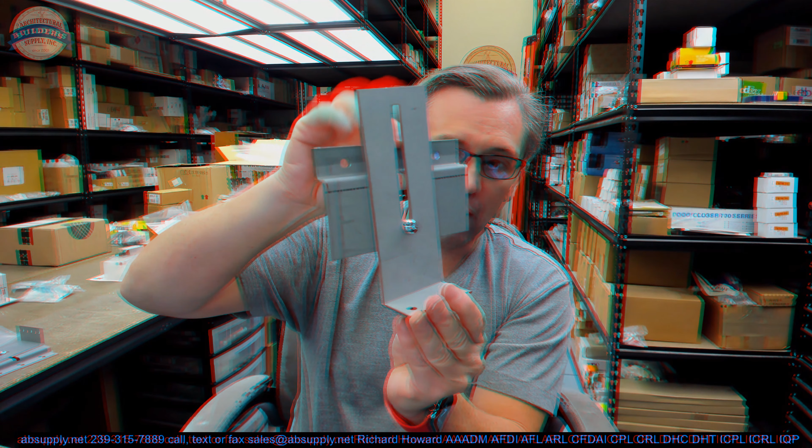And what that means is you've got a rectangle. The frame is a rectangle. The door needs to hang true, plumb, level, and square. If your floor is uneven, that frame is going to sit on the floor and it's not even. So what is done with an adjustable floor anchor is you've got your frame, you set it down on the high point. Well, it's on the low point that you're then going to drop. Basically, if it's here, you're going to drop this down. Okay? This is going to be attached to the throat of the frame. This will be welded in. This will be loose like this.

And, you know, Gulfport makes this with a nylon lock nut and a typical, you know, probably 1/4 sheet metal screw or a machine screw. And securing it together that way is clearly the concept. So you would put this in position. You'd put your frame in position. You would then mark where this needed to be exactly in your installation, no matter where it is.

Then secure the length of this or the projection of this, and this leg will be literally sitting below the bottom of the frame. Bring the frame back, and then you will set it down. It will be level. You'll secure it. You'll bring your wall up to it, and then how they fix the floor is how they fix the floor. More concrete, some sort of floor condition, or it's left that way, who knows.

But in a construction project where there's lots of masonry, poured masonry is where I would see these frames all the time. You could also obviously use it in an application where you've got, you know, a floor that's just not level, whether it be new or 100+ years old, or this poured concrete application. So the FR688 allows that vertical adjustment.

Not uncommon. In a hollow metal shop, I would certainly want to have a few of these laying around, but to bump into a last minute need for several dozen or hundreds of these, I've never encountered that. So that's where you're going to use this.

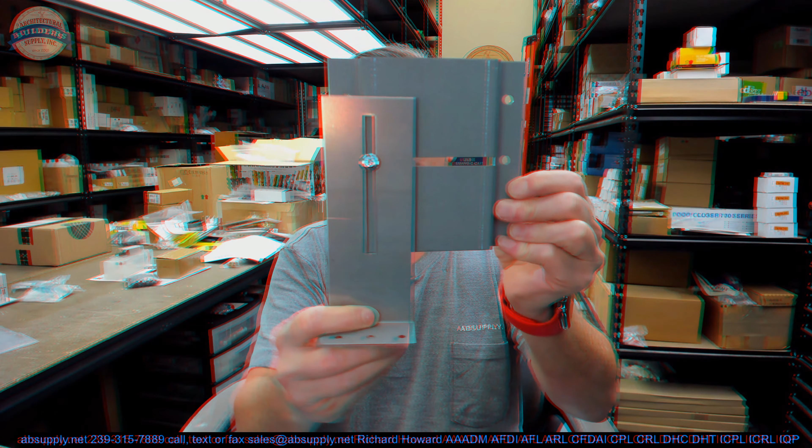You have not only an uneven floor, but now you've got a floor from your X-axis is not level, but now your Z, so to speak, your depth, it's stepped, or there's some completely horrible, awful situation that you're trying to set a frame into, where you literally need to take that and move it all the way over here and then drop it down to this area. Okay, that's where you're going to end up using this, because obviously you don't have a floor condition here where the frame needs to sit on top of.

Okay, so that would be an application of where you would use the FR688A. Pretty neat. I think that's really all there is to say about an adjustable floor anchor. In a hollow metal shop setting, I think you would have a few laying around, like I had just said earlier. Looking back at the SDI definition, they are showing it installed this way. They're not showing a Gulfport anchor, but literally it looks like this.

Okay, we're going to continue on with the definitions of anchors, and the next one up is called compression. Compression anchors are next, and let's talk about those next.

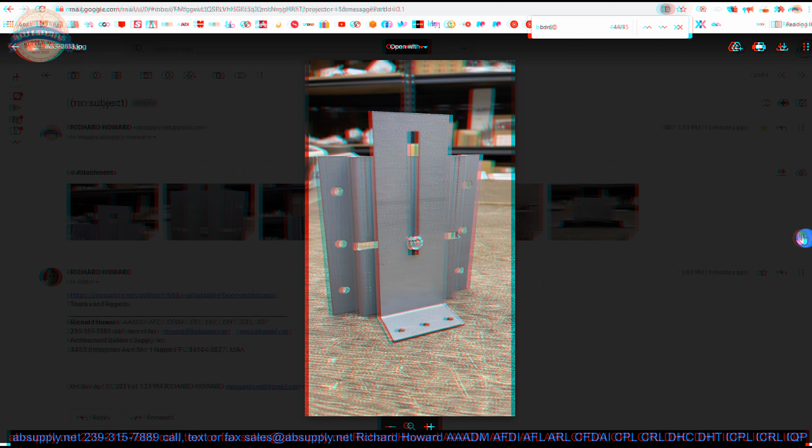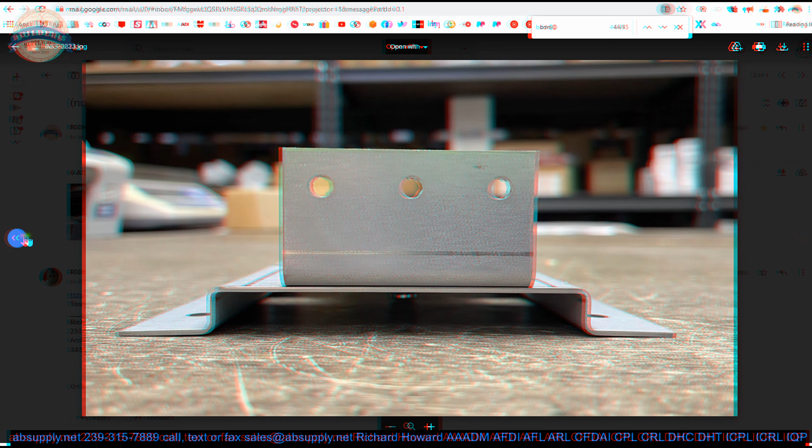All right, here's the item that we're looking at in the site. Let's take a look at some photographs that we have of this item. Here it is. It's what you'll be seeing if you're looking back into the throat of the frame. Side view, the back side view, top view, then the bottom. And the previous part of this video was pretty comprehensive. Obviously, this is where you'll secure it down to the floor. These holes here would be really great for plug welding or just welding on the outside corner.

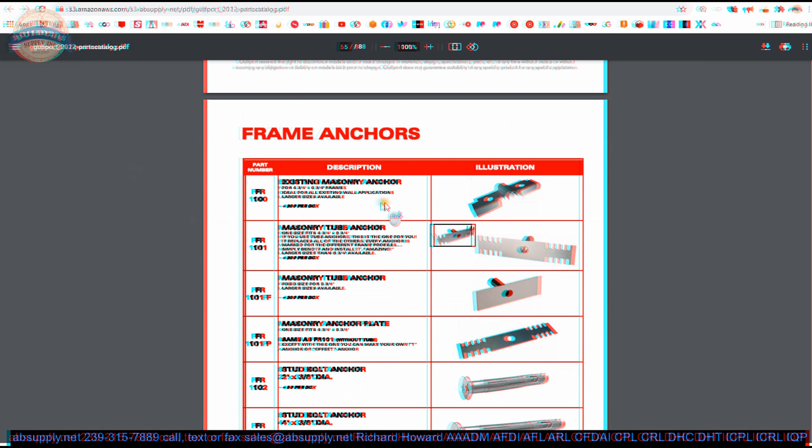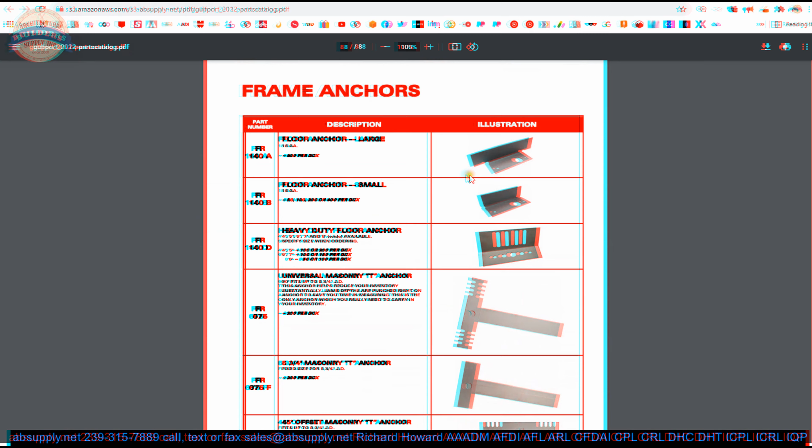As you get to the anchors, you're going to start seeing anchors. Existing wall anchors, stud anchors, sill anchors or base anchors, floor anchors, T anchors of different types, base anchors as well, double egress anchors for wood and metal studs, double egress masonry. This is a yoke and strap. Masonry strap anchor. I like this anchor a lot.

It's my favorite anchor. Back in the 1970s, I believe, welded in anchors were a requirement for a 3-hour labeled opening. Well, when I started in the industry in 1990, that was not the case, and they were very uncommon. I never saw them. We never stocked any of them. But later in the 90s, I stocked them, and I used them a lot for masonry applications because you can't forget the anchors when you deliver the frames.

They can't get lost. I've had one customer, he called me a number of times that he lost the anchors. Well, I wouldn't say that he called me the time that I welded the anchors to his frames, but he did call and say he can't locate the anchors. He says, I don't see the anchors. I says, do you have your frames? Are you looking at the frames? Yes. I says, well, you can see the anchors. Look in the throat of the frame. He says, what's that? Anyway, that was the routine I was getting.

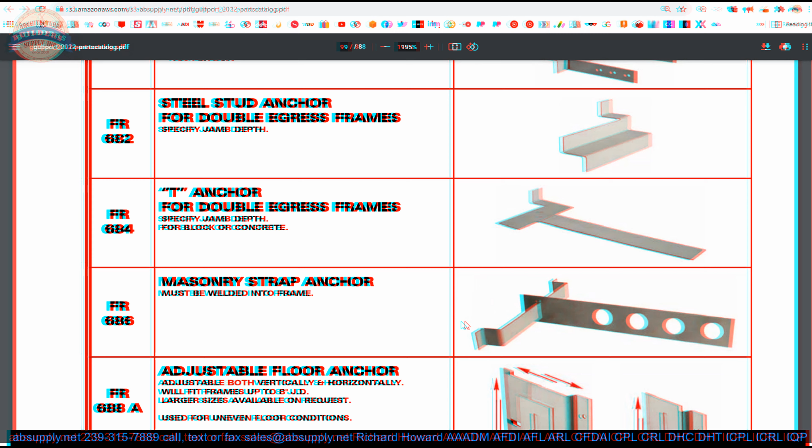So we solved his problem. I think he complained later about those anchors, not liking them as much, and I don't have a reason why he didn't like those anchors. But we did solve the problem of them getting lost, so to speak. Then here are our floor anchors from Gulfport, our Y-axis only, and then our Y and X-axis, the A and then the F version for uneven floor conditions, as we've gone over at length.

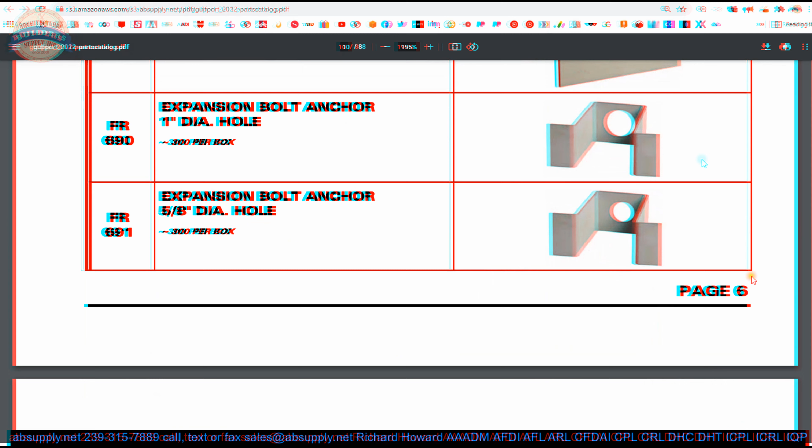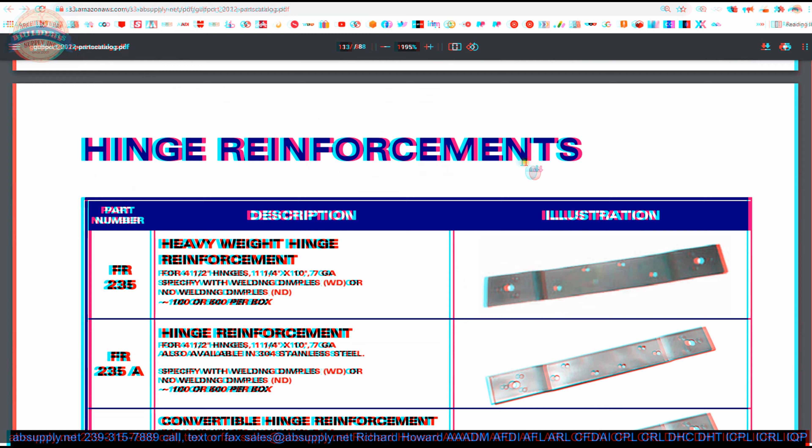Wire anchors, metal stud anchors. These are existing wall anchors as well, or expansion bolt anchors they call them. Stud anchors, compression anchors, corner bracket for frames. You're going to use this when you're putting mitered items together. Silencers, caps, reinforcements, things of that nature. If you ever have even an occasional need for anchors, you'll likely want to at least bookmark this document. We don't stock all of this stuff, not nearly, but we do certainly keep the common material on hand.

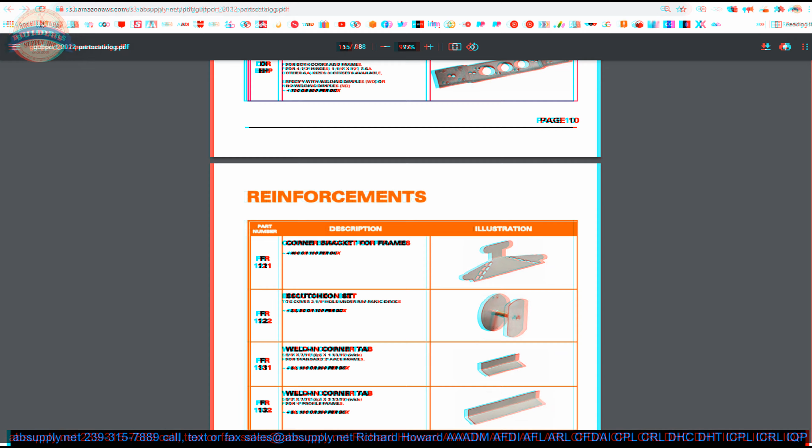In conclusion, we don't sell very many of these types of floor anchors, and it's very unusual when they're needed. And it's very unusual to have your customer actually tell you beforehand that he'll need these. I had one job where the project manager was really that forthright. The man was extremely pleasant, extremely smart, thought 3 steps ahead, never pulled any last-minute shenanigans on us, was extremely pliable when it came to, let's not do these locks, let's do these locks.

And he called me and said, I'm going to need floors. This was the 910 South Michigan building, which was the old Standard Oil building, kind of across the street from Soldier Field in Chicago, right near Columbia College. I forget how many floors are in that building. 40, 50, a mid-rise building. And they were pouring the concrete, and some of the pours were really awful.

And he says, you know what an adjustable floor anchor is? Didn't say that. He says, I've got some situations where my jamb's not going to hit the floor on one side because the floor is like this. It'll hit over here, but it ain't going to hit over here. And I says, I know what you need. Tell me the hand. Tell me what side you need this on. I'll put them on one side or both.